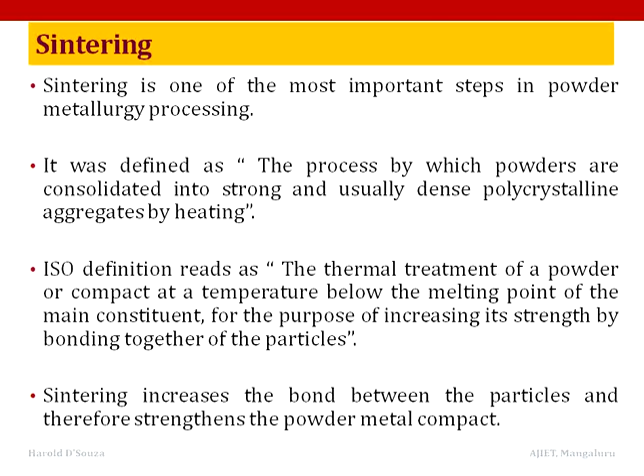The temperature used for sintering is below the melting point of the powdered material, around 0.6 to 0.8 times the melting point. The atoms diffuse across the boundaries of the particles, fusing the particles together and creating one solid piece.

Sintering involves a single component system where self diffusion is the major material transport mechanism and the driving force results from the chemical potential gradient due to the surface tension and the capillary forces between the particles,

and a multi-component system where interdiffusion occurs, with the concentration gradient being the major driving force for sintering in addition to self-diffusion caused by surface tension and capillary forces. In this sintering, liquid phase formation and solid solution formation also occur with densification.

The first theory was proposed by Sauerwald in 1922. The theory says that there are two stages involved in sintering, namely adhesion and recrystallization. Adhesion occurs during heating due to atomic attraction, and recrystallization occurs at the recrystallization temperature. In recrystallization, microstructure changes, phase changes, grain growth and shrinkage occur.

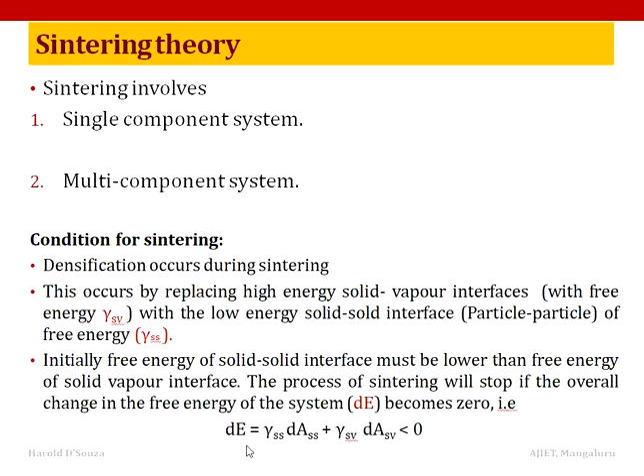Initially, the free energy of the solid-solid interface must be lower than the free energy of the solid-vapor interface, and the process of sintering will stop if the overall change in the free energy of the system, that is dE, becomes 0, where dASS and dASV are the interfacial areas of the solid-solid and solid-vapor interfaces.

Initially, the surface area of the compact represents the free surface area, since no grain boundaries have developed, and hence ASV is equal to ASV0 and ASS is equal to 0. As sintering proceeds, ASV, the solid-vapor area, decreases and the solid-solid area increases. The sintering process will stop when dE is equal to 0.

Therefore, from the expression we get gamma SS by gamma SV is equal to minus dASV by dASS. So densification stops when minus dASV is close to 0. So to achieve densification without grain growth, the solid-solid interface must be maximized. Such conditions can be achieved by doping or by using suitable sintering conditions for surface free energy maximization.

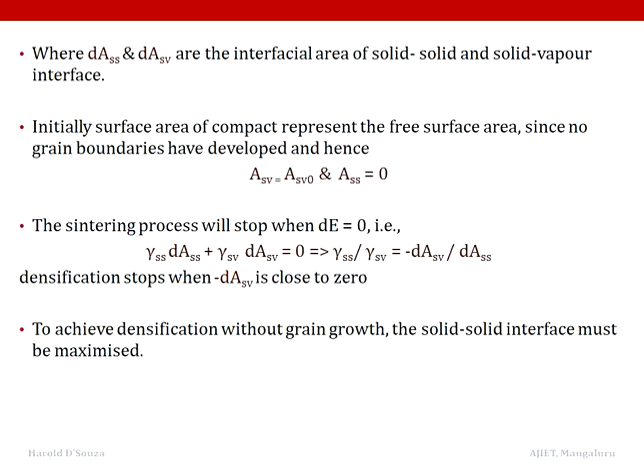Now the stages in solid state sintering. In general, solid state sintering can be divided into 3 stages. The first stage is the neck stage. Here necks are formed at the contact points between the particles, which continue to grow, and during this rapid neck growth the pores are interconnected and the pore shapes are irregular.

The second stage: here, with sufficient neck growth, the pore channels become more cylindrical in nature. The curvature gradient is high for small neck size, leading to faster sintering. Now with sufficient time at the sintering temperature, the pore eventually becomes rounded. As the neck grows, the curvature gradient decreases and sintering also decreases.

This means there is no change in the pore volume, but with the change in pore shape, pores become spherical and isolated with continued sintering. A network of pores and a skeleton of solid particles will be formed. The pores continue to form a connected phase throughout the compact.

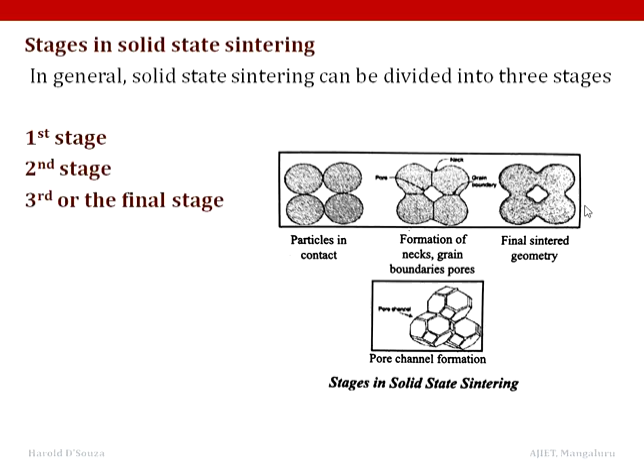The third or final stage: in this stage pore channel closure occurs and the pores become isolated and are no longer interconnected. Porosity does not change and the small pores remain even after long sintering times.

Types of sintering. Sintering, which involves heating powders in the compacted form or as a loose mass, has several variations, and they are briefly discussed.

Solid state sintering. This is a commonly occurring process of consolidation of metal and alloy powders, usually loose powders or compacts. In solid state sintering, the densification is a result of atomic diffusion in the solid state.

Next is the liquid phase sintering. One of the most commonly used methods of achieving rapid densification of a powder compact is liquid phase sintering. In this form of sintering, the densification is enhanced by employing a small amount of liquid phase, which typically is around 1 to 10% by volume.

The liquid phase coexists with the powder particles at the sintering temperature and has some solubility for the solid. The composition of the powder compact and the sintering temperature are chosen such that a sufficient amount of liquid is formed between the solid particles of the compact. On cooling, the liquid crystallizes or forms a solid phase at grain boundaries, binding the grains.

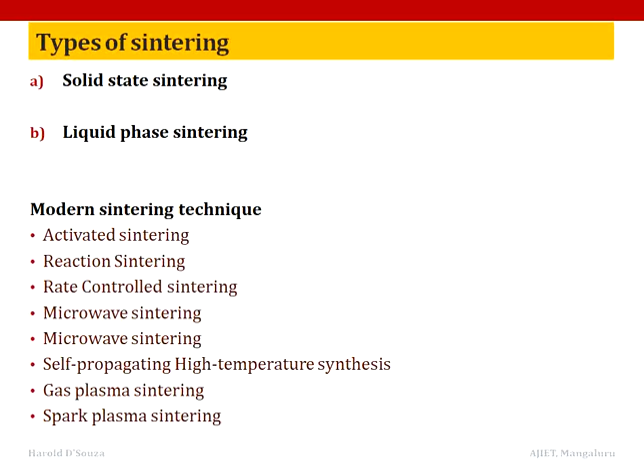Microwave sintering. Microwaves have also been used to carry out sintering of powder compacts. Microwave sintering has the advantage of producing a finer grain size compared to pressureless sintering due to the faster heating rate and also shorter dwell time at the selected temperature. However, problems such as hot spots and melting of the compact may occur.

Self-propagating high temperature synthesis. Self-propagating high temperature synthesis is an exothermic combustion process that uses the heat generated during the reaction to sinter the material. Now, self-propagating high temperature synthesis reaction can take place between gases, liquids and solids. Porous materials such as filters and catalyst supports with a higher strength than those obtained by conventional methods have been produced by this SHS, that is self-propagating high temperature synthesis. Now, the process, although very fast and economical, needs an additional densification step to make useful shapes and hence adds to cost and time.

Gas plasma sintering. The sintering source used in gas plasma sintering can be a DC cathode source, radio frequency waves or microwaves. The advantage in gas plasma sintering, as in case of microwave sintering, is the possibility of producing fine grain material.

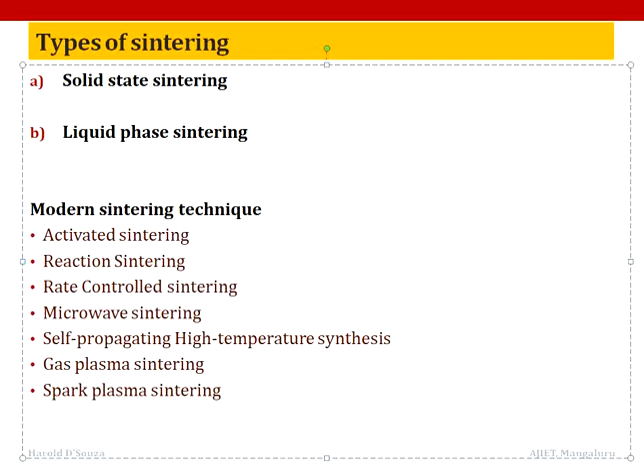Spark plasma sintering. Spark plasma sintering or SPS is a process similar to uniaxial pressing in which a momentary DC current pulse is generated in addition to the Joule heating. Now, by producing a spark between the powder particles, the temperature during SPS can reach up to 5000 to 10,000 degree centigrade, but only momentarily, so that no melting is allowed to take place. Functionally graded materials can be produced by this method.

Structure and property change during sintering. Now, the main purpose of sintering is the densification of the compact powder. Densification is proportional to the shrinkage or the amount of pores removed in the case of a single component system. In case of multi-component systems such as pre-mixed powders, during sintering, solid solutions may form, resulting in an expansion rather than shrinkage. Hence, densification cannot be treated as equal to the amount of porosity removed. Expansion of the compact powder may also take place due to the entrapped gases.

Densification usually results in a change in the structure of the component, which includes changes in the shape, size and size distribution of grains as well as those of the pores present in the initial compact. Reduction of the surface oxide may occur during sintering in a reducing atmosphere. In case of a powder mix containing metals having lower melting point, evaporation or volatilization of these elements can occur and proper care must be taken. Other changes taking place during sintering may include recrystallization and grain growth. Pore growth also occurs if sintering is carried out for a longer time at high temperatures.

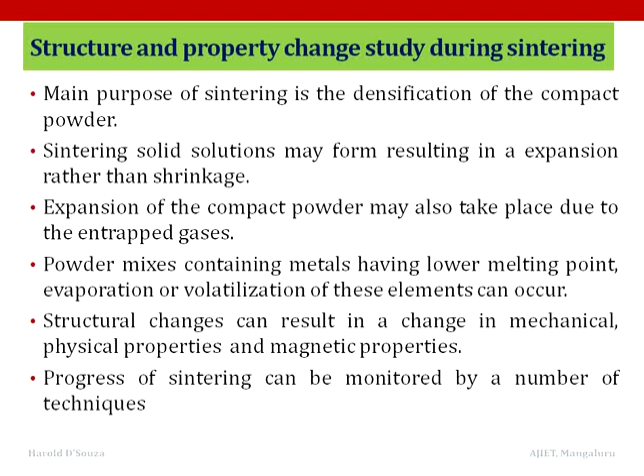As a consequence, the structural changes result in a change in the mechanical properties such as hardness, strength, fracture toughness, physical properties such as electrical and thermal conductivity, and magnetic properties such as permeability of the material. Now, other changes such as formation of the solid solution may lead to a change in the composition. The progress of sintering can be monitored by a number of techniques. Dilatometry studies can be used to study the densification during the process itself. Other methods such as quantitative microscopy or porosimetry studies can be done on samples sintered for specific times to follow the densification.

Defects analysis of the sintered components. Sintered products are often used to replace traditional metals for cost saving or technical improvements, or ideally both. In either case, it is necessary to quantify the service parameters in terms of physical, mechanical, and chemical properties. Moreover, while dealing with sintered products, one must emphasize the need for function awareness when specifying the material. Unfortunately, in the powder metallurgy industry, there is not enough record of past tallies which may help in selecting a material that will satisfactorily perform a particular function. To simplify the matter, the first thing is to define the function of the component and develop the functional tests which will determine whether the part will do the job.

This brings out the importance of differentiating between the material tests and the product tests. The former provides information about the properties of the material of a test piece in relation to its intended application. The product tests, however, specifically check the immediate fitness for service of the product and the batch from which it has been drawn. A detailed analysis of the quality control aspect has been reported here. Some factors which may handicap the quality of the sintered products may be the testing and inspection procedures which do not realistically reflect the actual use situation. For example, the particle size yield in flow screening by vibro screens versus the laboratory routine screening.

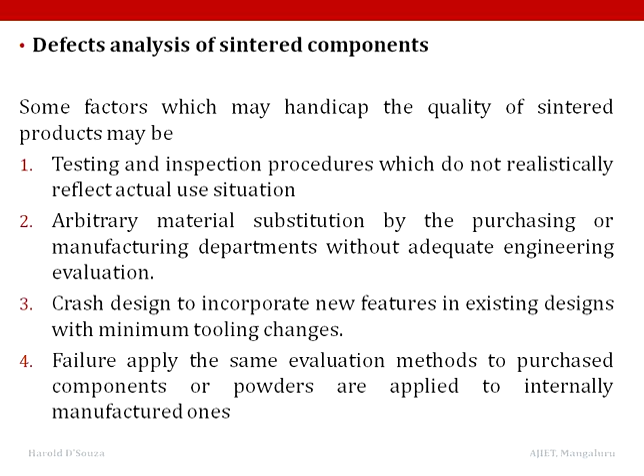Seventh, interpretation of the statistical quality control function as absolute quality assurance rather than a basis for action. Eighth is the inadequate advice to the user of safety procedures related to the product. For example, iron based metal powder sintered bearings are more suitable for higher loads and slower speeds than copper based bearings.

And last one, the powder metallurgy process allows a considerable cost variation if specific part requirements are not clear. Such a situation would consequently bring forth a considerable quality variation too. For widely different costs, there may be various reasons such as a revision of a tolerance, differences in manufacturing practices, introduction of supplementary processes such as repressing, etc., and maybe lack of any specified minimum density. In brief, gross difference in quality may lead to a serious misunderstanding of the requirements.

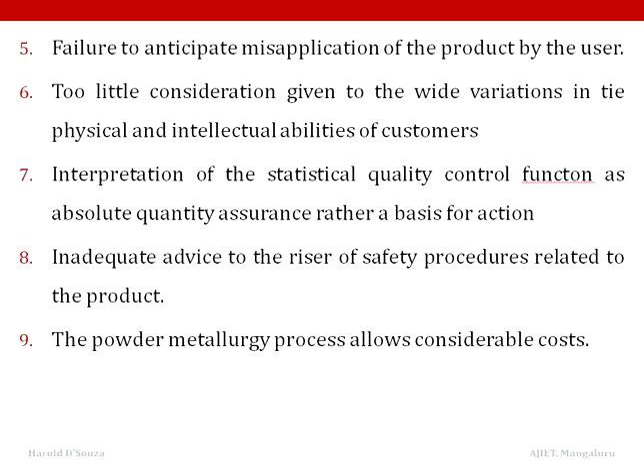Applications: electrical and electronic, that is, tungsten contact materials. Electrical contact materials are produced by either slicing rod made from metal powders, infiltrating a porous refractory skeleton, or compaction and sintering of powders. Tungsten contacts cut from the rod are resistant to deformation under a large number of cycles at relatively high forces, and they have high hardness and strength. Now, they have the ability to switch high currents without detrimental arcing or welding and vaporize very little in an arc.

Now, these contacts meet the requirements of many automotive, aviation, and appliance applications. They are, however, very limited in use because an insulating oxide film forms during switching. Copper and silver combined with refractory materials such as tungsten, tungsten carbide, and molybdenum are the principal materials for electrical contacts. A mixture of the powders is pressed and sintered, or a previously pressed and sintered refractory matrix is infiltrated with molten copper or silver in a separate heating operation.

The composition is controlled by the porosity of the refractory matrix. Copper tungsten contacts are used primarily in power circuit breakers and transformer tap changers. They are confined to an oil bath because of the rapid oxidization of copper in air. Copper tungsten carbide compositions are used where greater mechanical wear resistance is necessary.